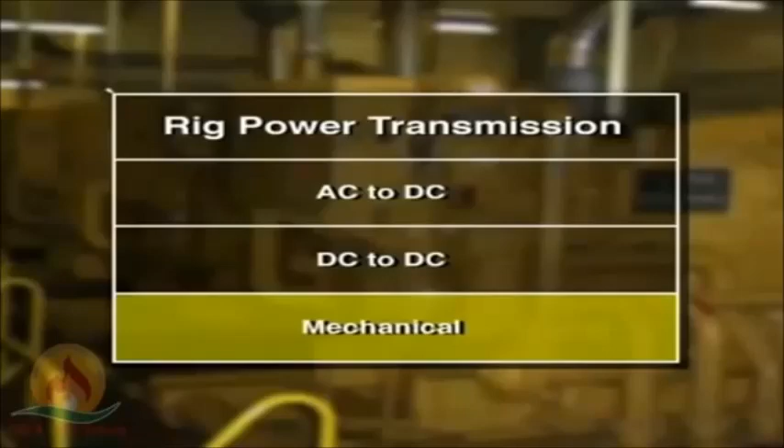At the heart of every rig power system, whether electrical or mechanical, is the prime mover. A prime mover is the rig's main source of power. Most rigs have more than one prime mover. Prime movers are almost always large internal combustion engines.

Some equipment on the rig requires hydraulic power and pneumatic power. The rig's hydraulic and pneumatic systems also obtain their power from one of the three basic distribution systems.

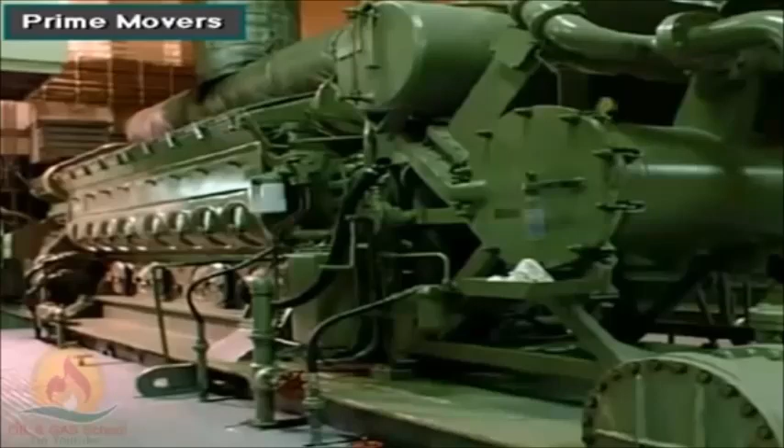Large diesel engines are the main power source, the prime movers for most rigs. These engines often produce from 500 to over 8,000 horsepower, or 350 to 5,600 kilowatts.

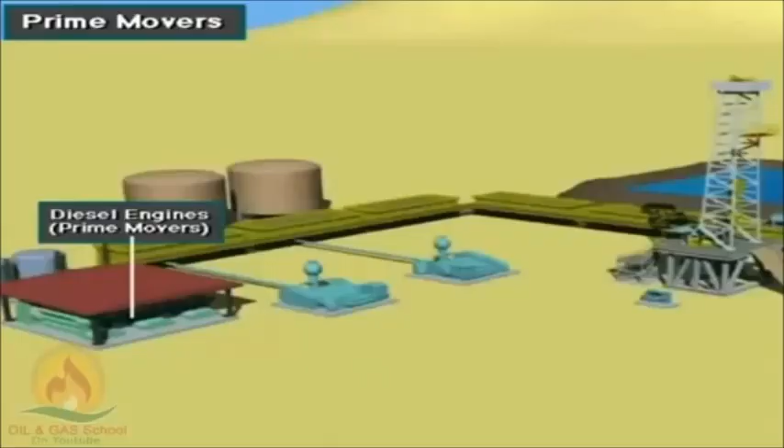Rig builders usually house several engines together to drive the rig equipment. They also keep extra engine sets available for backup operations.

Most rig engines are diesel because, unlike gasoline engines, they can produce a lot of power when running slow. Also, diesel fuel is not as volatile as gasoline, so it's safer to use, transport, and store.

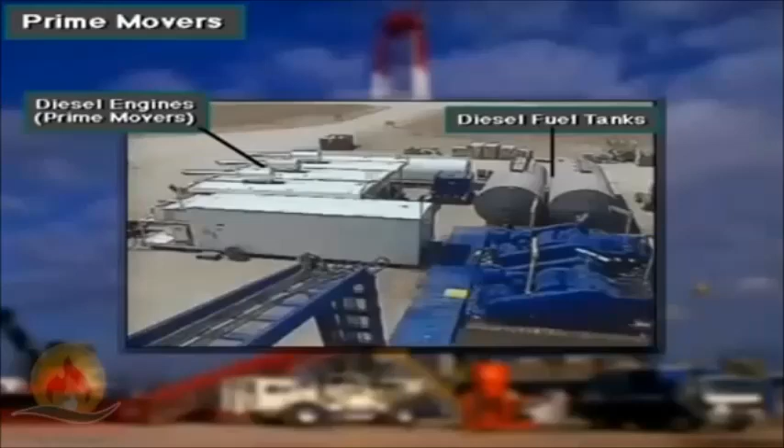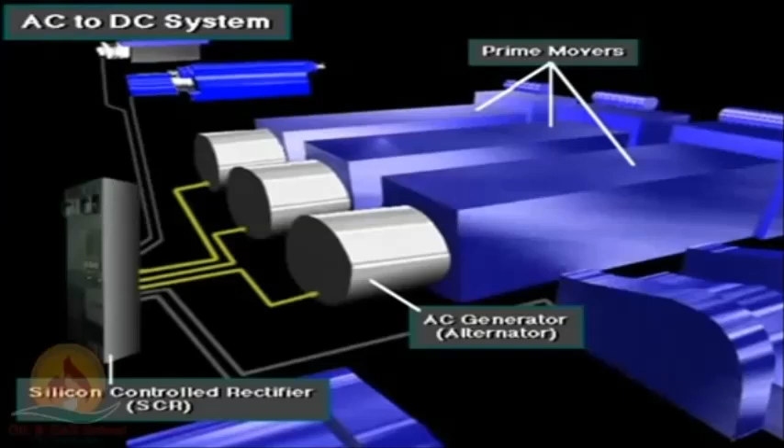The SCR converts AC to DC current, which drives the heavy rig equipment, such as the mud pumps, the drawworks, and the rotary system.

Auxiliary loads, such as small pumps and rig lighting, need lower voltage AC power, so a transformer steps down or reduces the voltage to the rig's auxiliary electric equipment.

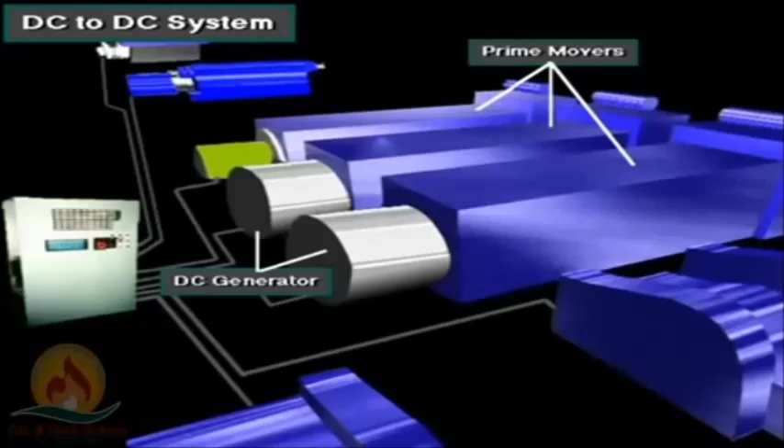Here's a DC to DC power system. The prime movers, usually diesel engines, power DC generators. From the generator, DC current goes through a control panel directly to DC motors.

The DC motors power the mud pumps, the drawworks, and the rotary system.

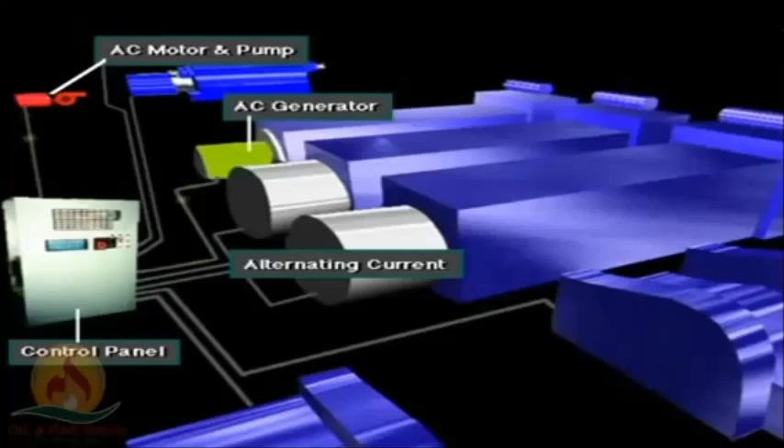A smaller AC generator is also part of the system. It supplies AC current for equipment that works best with this current type. For example, a chemical mixing pump requires AC power.

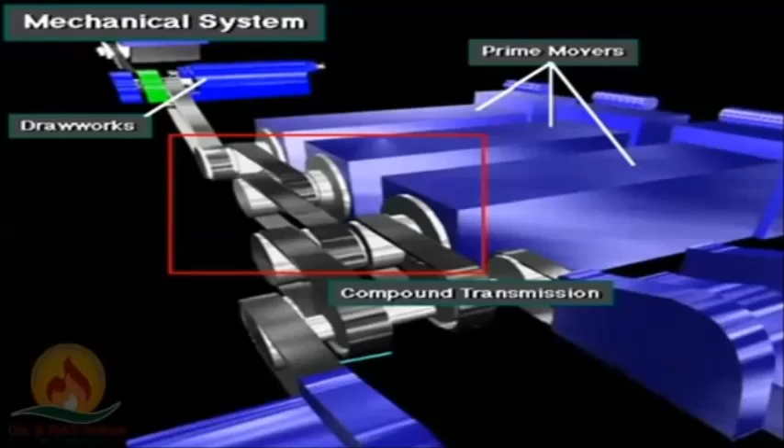The prime mover drives a mechanical compound transmission, which in turn powers the drawworks, the rotary table, and the mud pumps.

Auxiliary loads, such as small motors, are supplied with AC from an alternator connected to the prime mover.

Alternating current put out by the AC generators goes through heavy-duty electric cables to a special device called a silicon-controlled rectifier, or SCR. The SCR converts AC to DC.

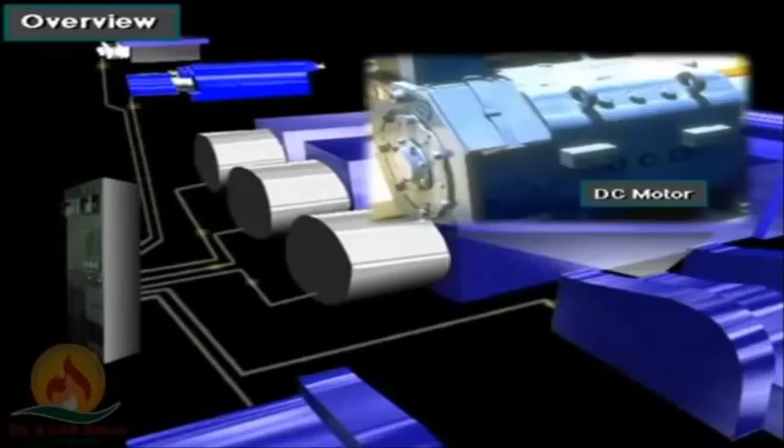Other heavy-duty electric cables carry DC electricity to the DC motors. The DC motors convert electrical energy back into mechanical energy to drive the powerful hoisting, rotating, and circulating equipment.

Rig owners like to use AC generators because they can be built to be very powerful for their size, which is an advantage over DC generators. Also, rig equipment can distribute AC easier than DC.

But direct current has certain advantages when driving large equipment. Mainly, DC motors produce a lot of torque at low speed that the drillers can easily control.

Using remote switches on his console to control the SCR control panel, the driller can select and deliver the power from the various generators wherever it is required.

But some AC generators power big motors. In fact, most of today's diesel electric rigs use AC generators in a system called an SCR power system.

Here, a large AC generator, an alternator, is connected to the diesel engine prime mover. As the engine mechanically drives the AC generator, the generator produces alternating current, or AC electricity. AC is like the electricity used in most cities and homes.

Equipment in this electrical cabinet converts, or rectifies is the electrical term, most of the AC current produced by the AC generators into direct current.

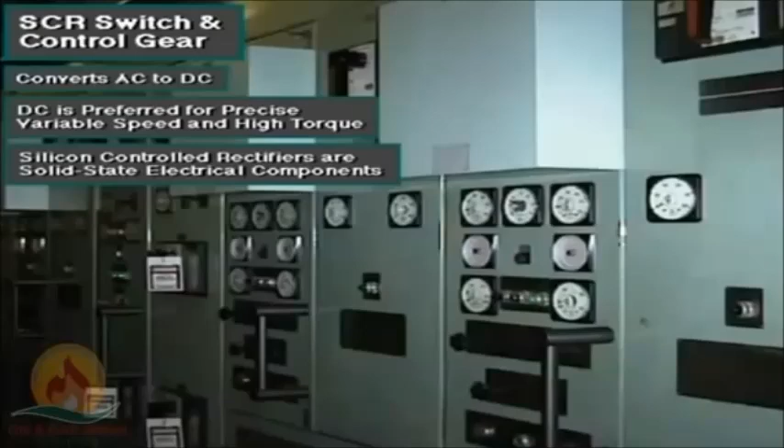The control equipment includes solid-state electrical components called silicon-controlled rectifiers, or SCRs. Heavy-duty electrical cables come out of the cabinet and carry DC electricity to the powerful motors driving the circulating, hoisting, and rotating equipment.

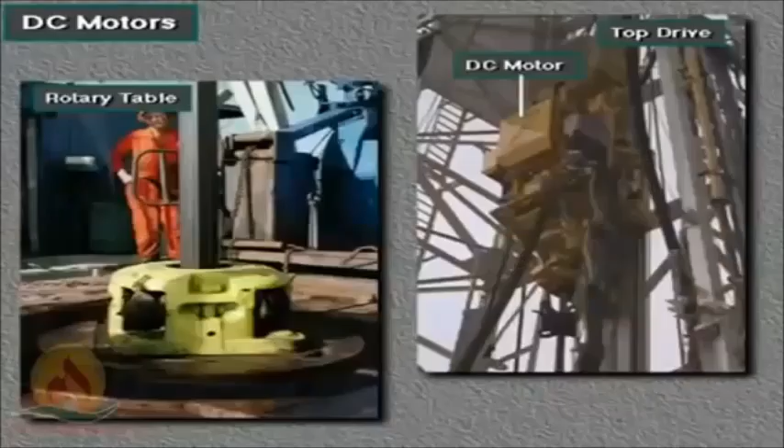Usually, large DC motors supply power to the mud pumps, the drawworks, and the rotary table or top drive. Sometimes the drawworks mechanically drives the rotary table, but on some rigs the rotary table has its own motor.

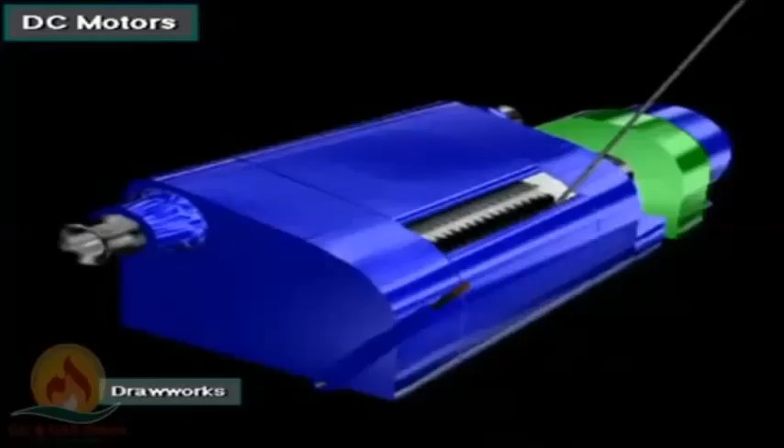The driller can control the speed of a DC motor very accurately, which is why rig owners use DC instead of AC motors. With accurate speed control, the driller can accurately set the speed the drawworks lifts, the mud pump operates, and the rotary table turns on rigs without a top drive.

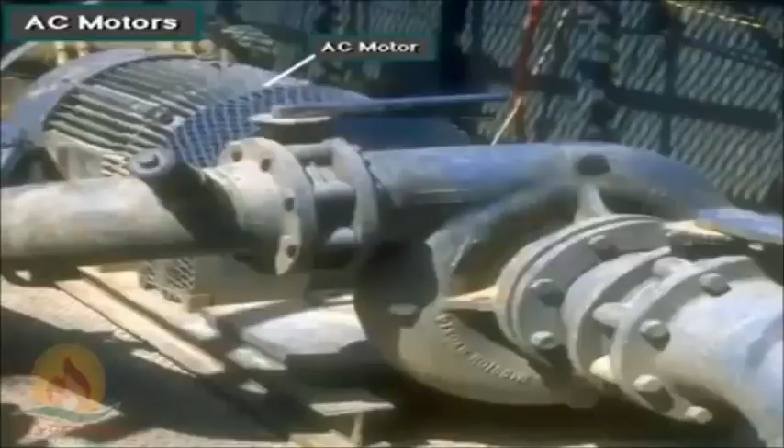Various small components on a rig need power too. For instance, these two centrifugal pumps move mud from a tank to supercharge the intake of the mud pumps. In this case, it's more efficient to use small motors to power the centrifugal pumps rather than using the prime movers, hydraulic fluid, or air.

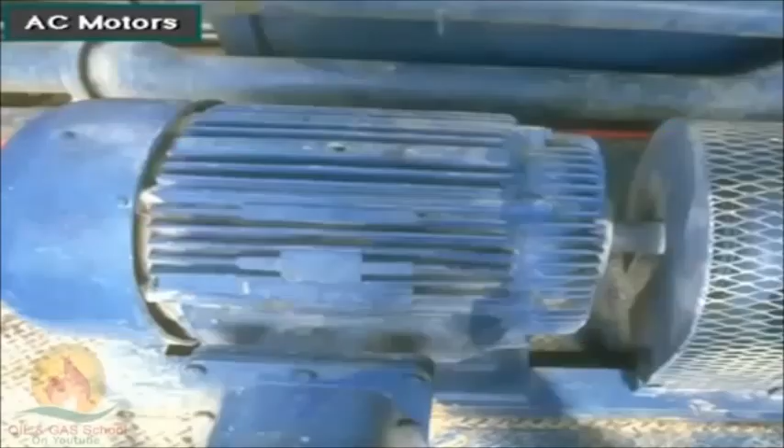Here's another AC motor. It powers the paddles on the mud agitator in a mixing tank. AC motors generally power equipment that does not require a lot of horsepower, so they vary in power from less than 1 horsepower, or 0.75 kilowatts, to more than 150 horsepower, 100 kilowatts.

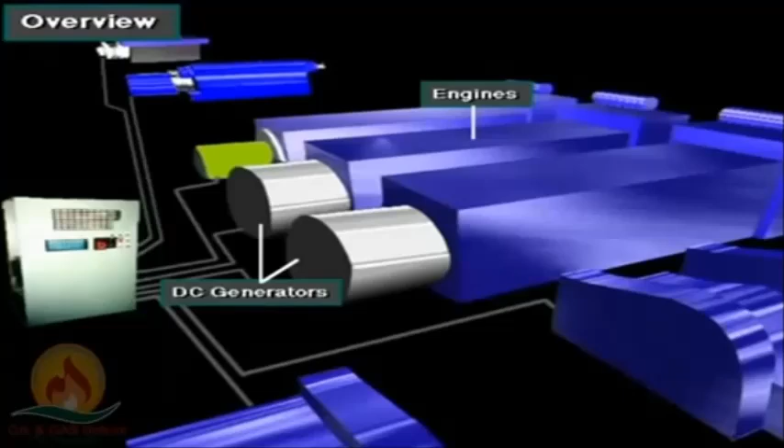For electric power distribution, some rigs use DC to DC power. DC to DC was the first electric power system. In a DC to DC system, each engine drives a DC generator, which converts the rotating mechanical energy of the diesel engine into DC electricity.

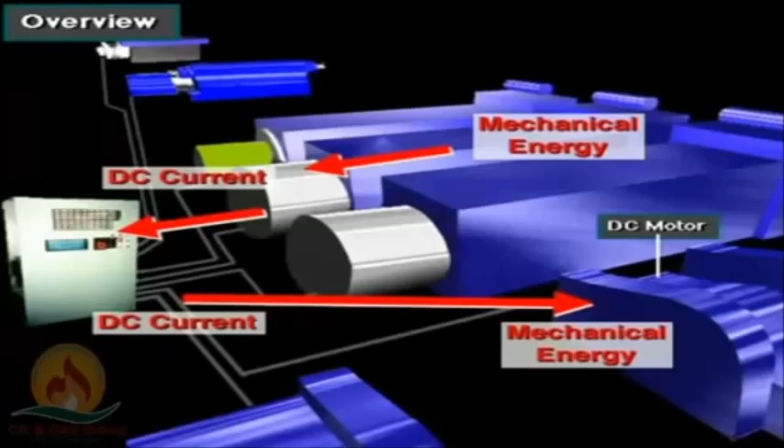Heavy-duty electrical cables carry DC electricity via the control panel to large 1,000 horsepower or 700 kilowatt DC motors. The motors convert the electricity back into mechanical energy. This mechanical energy powers the hoisting, rotating, and circulating equipment.

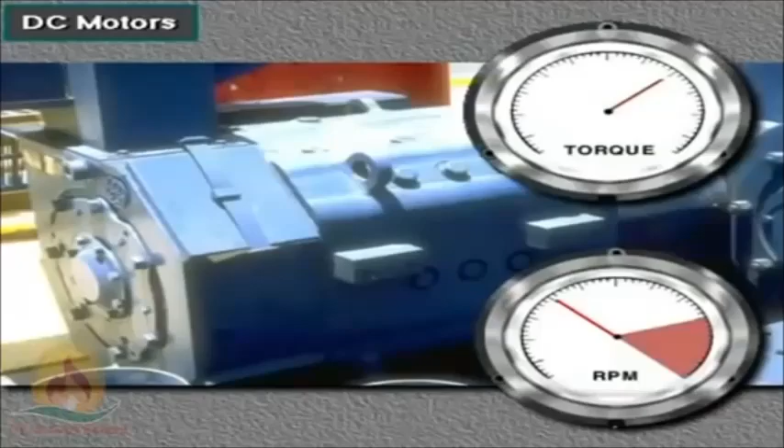For large equipment, most rig owners prefer DC motors over AC motors. DC motors put out high torque, twisting force, at low speed. Further, the driller can easily control the torque from his console on the rig floor. Keep in mind, though, that recent technological advances are allowing computerized controls and variable speed AC motor drives to be used where only DC motors were used in the past.

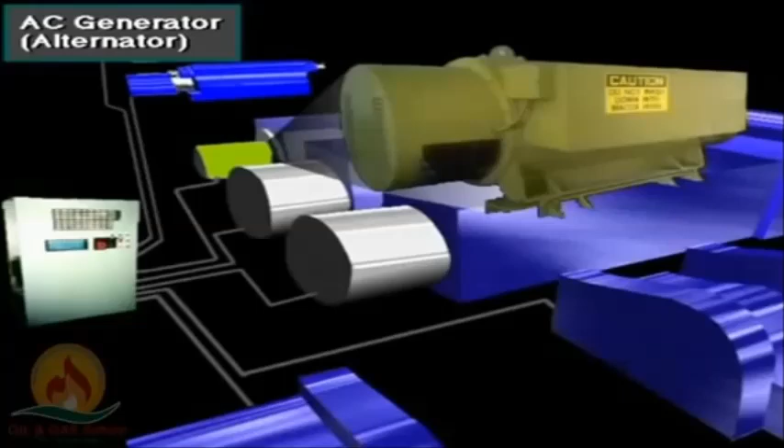This is a generator, or alternator, on a DC to DC rig. It generates the AC electricity that DC to DC rigs need. The alternator powers smaller equipment on the DC to DC rig, like the small AC motors on centrifugal pumps.

Air conditioners. Lights. Fans. Water maker units and other small equipment.

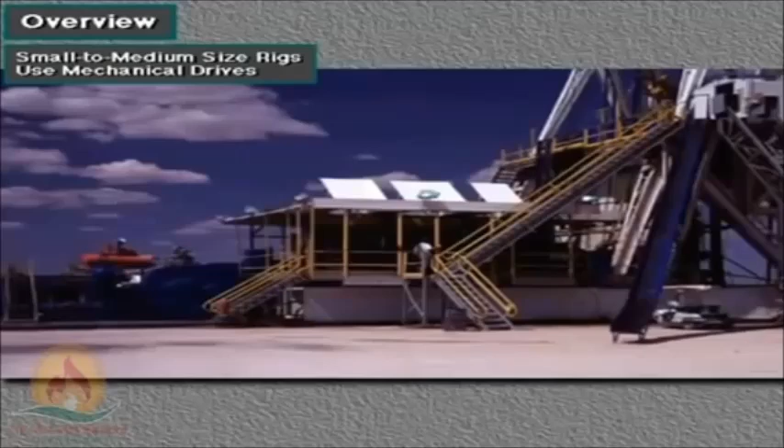Mechanical drive rigs normally compound or connect 2 or more engines to drive the main pumping, rotating, and hoisting equipment. Generally, small to medium-sized land rigs use mechanical drives.

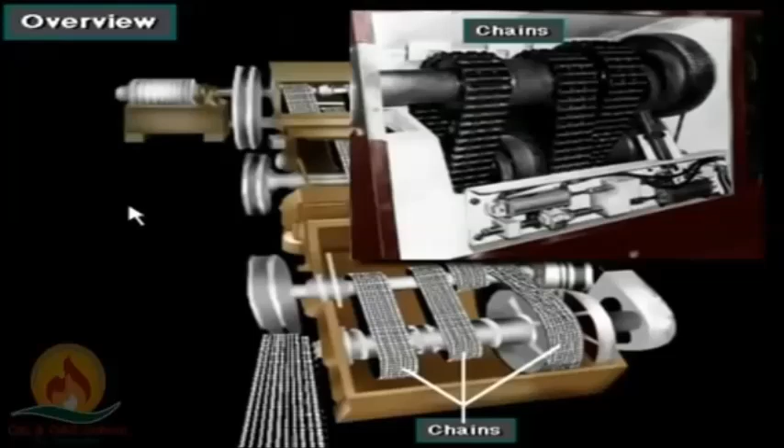They use clutches, converters, chains, shafts, belts, or compounding transmissions to connect the prime movers to the driven equipment.

Here's a common way to get power to the components on a mechanical drive rig. This shows 3 engines that the rig owner compounded. That is, the power from each engine goes through a series of sprockets and chains in a housing, called a compound.

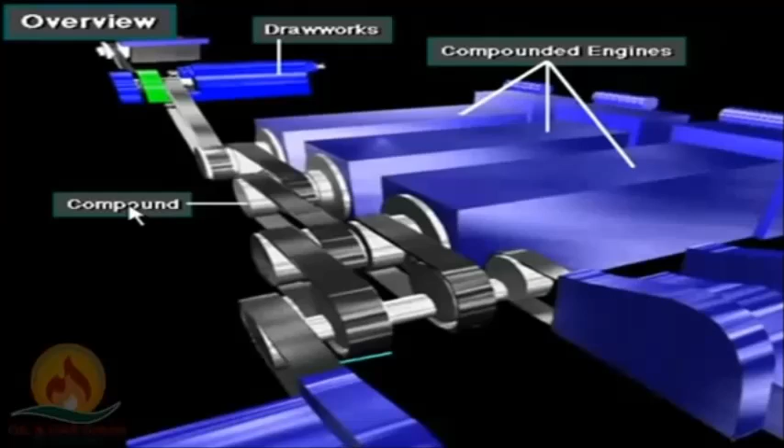The compound transfers engine power to the drawworks, the rotary table, and the mud pumps.

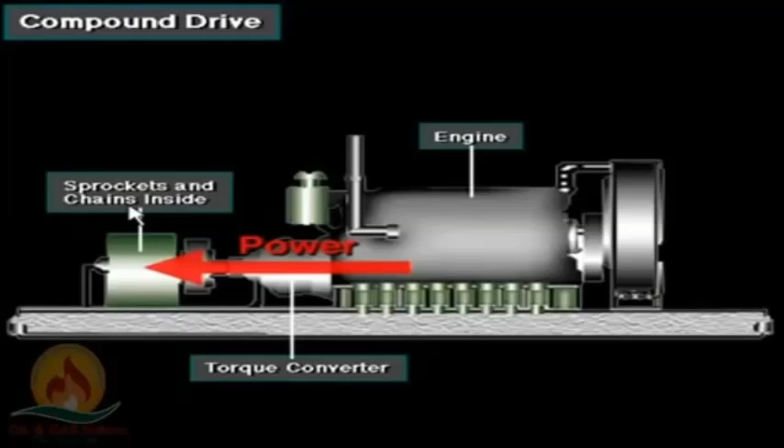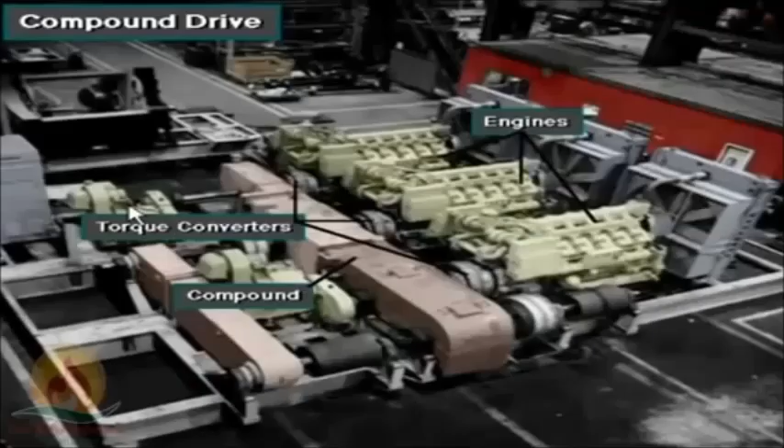In a compound drive, engine power usually goes through torque converters to the sprockets and chains. Steel guards cover the sprockets and chains, removed here so you can see them. Torque converters smoothly transfer engine power to the compound.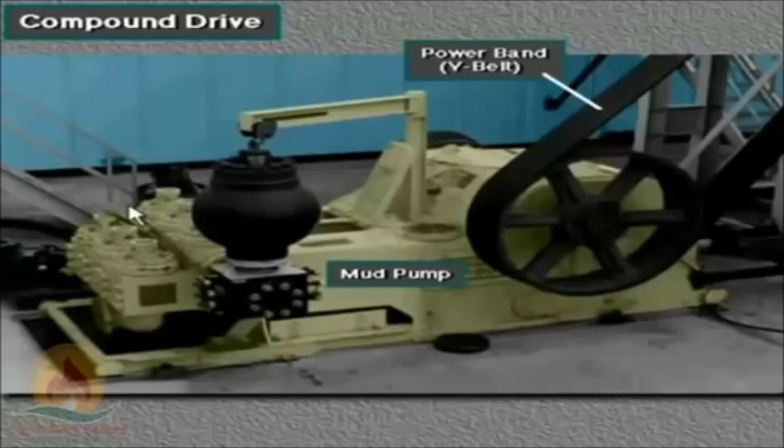Here, you can see the steel guards covering the machinery in the compound. Not only do the guards protect personnel, they also keep a lubricating oil spray confined to the chains and sprockets. Also, note that large V-belts, called power bands, drive the mud pumps. Steel shrouds also guard them.

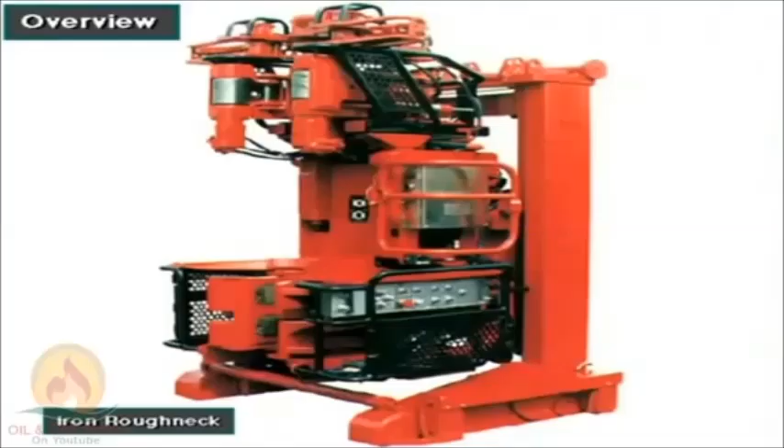Many tools use hydraulics to transmit power. Examples include the Kelly spinner, the iron roughneck, and casing tongs.

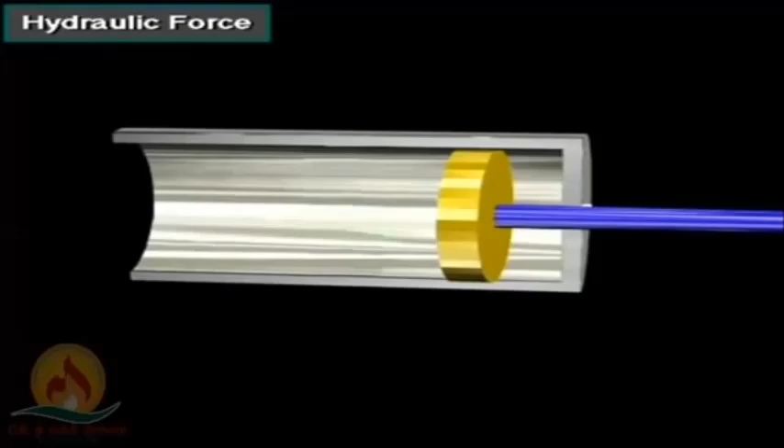Hydraulics is a means of transmitting power by pushing on a confined liquid. Here's a piston moving inside a cylinder. Hydraulic fluid fills the cylinder to the left of the piston. The piston's surface area is 10 square inches.

If a pump puts 1,000 pounds per square inch, or psi, of hydraulic fluid pressure on one side of the piston, this 1,000 psi acts on the 10 square inch piston to produce 10,000 pounds of force. That's a lot of force available for powering certain tools and equipment.

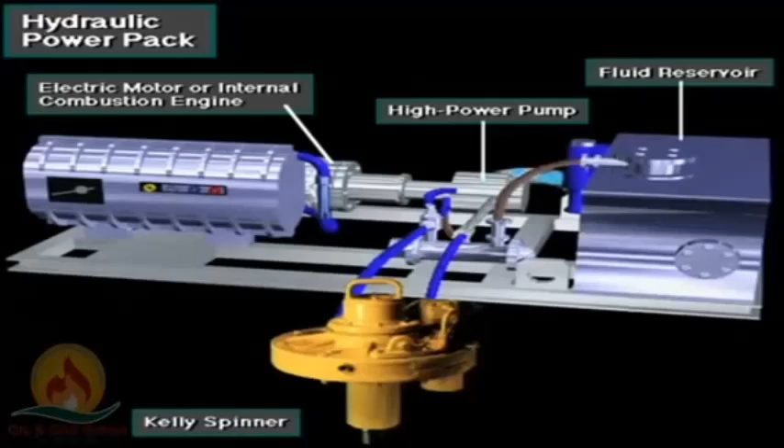Here's a typical hydraulic power pack used on many rigs. It has an electrical motor or an internal combustion engine to power the high-power pump. The pump takes hydraulic fluid from the reservoir and sends it out a high-strength steel-reinforced hose to the devices needing hydraulic power.

The fluid returns to the reservoir after it passes through the Kelly spinner or other tool. The hydraulic power pack is a closed system. The fluid is used over and over.

Certain controls, valves, and tools on the rig are air or pneumatically operated. For instance, the driller uses pneumatic controls on the driller's console to engage and disengage clutches on equipment like the drawworks.

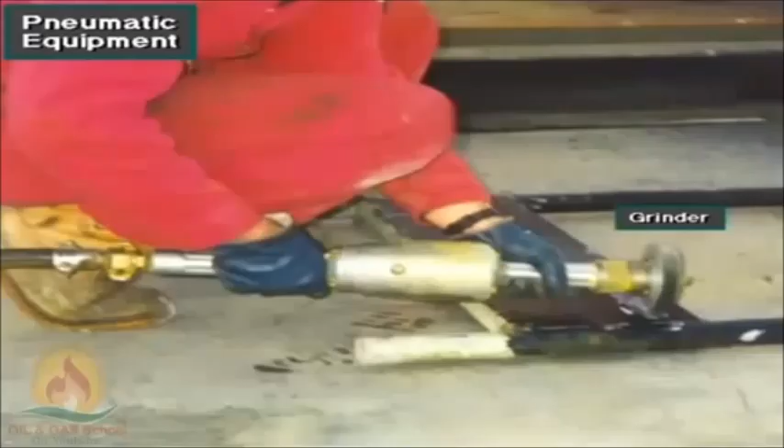The rig crew may use air-powered hand tools, like a grinder. They also use an air hoist, an air-powered winch, to hoist and move relatively light equipment onto and around the rig floor.

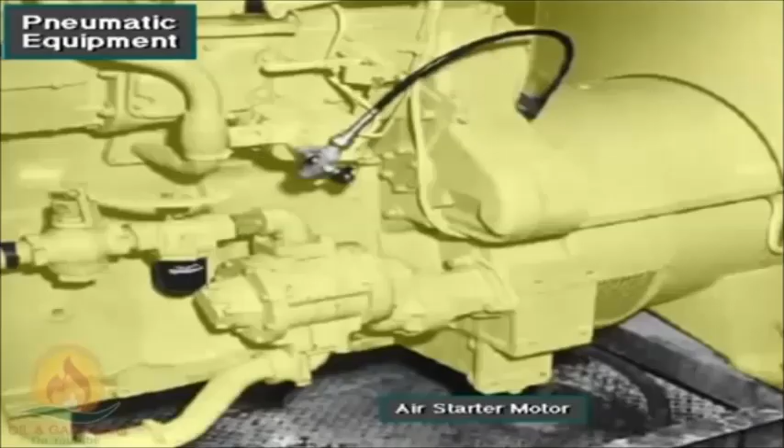Many diesel engines on rigs have an air starter, which is an air-operated motor that turns the engine crankshaft over to start it. Finally, a floating rig's motion compensator operates on large amounts of compressed air to compensate for vessel heave while keeping the drill string in position.

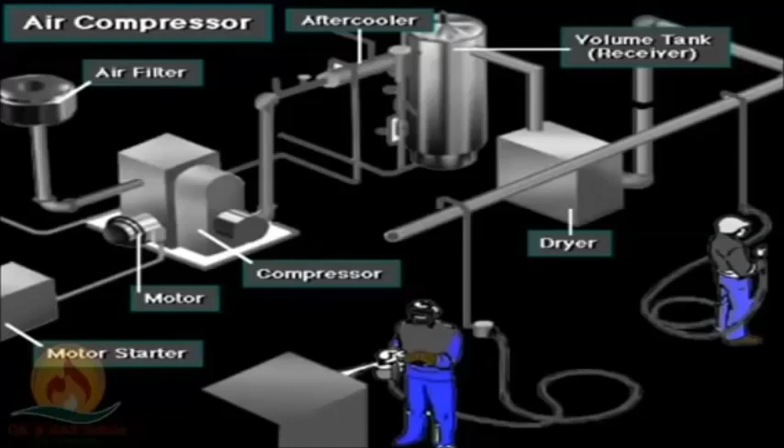An air compression system provides air pressure to operate the pneumatic controls, valves, and tools on the rig. Rigs use rotary screw compressors or reciprocating compressors to compress air. A typical reciprocating air compressor has 2, 3, or 4 pistons moving inside cylinders.

The compressor takes in air from the atmosphere and raises its pressure, that is, compresses it. The volume tank stores a given amount or volume of compressed air that is ready for use when needed.

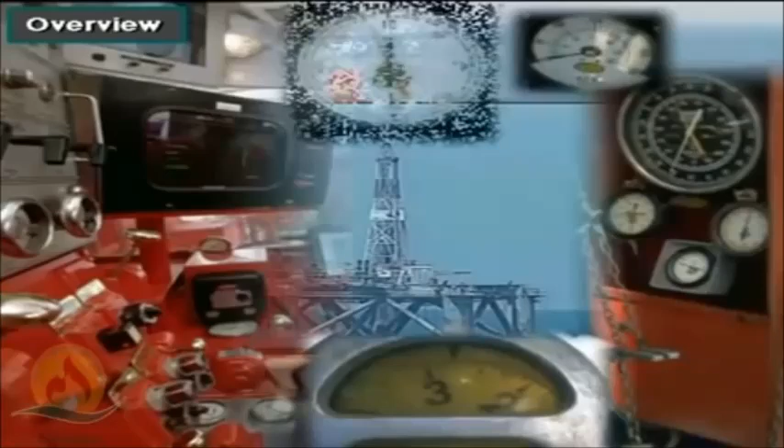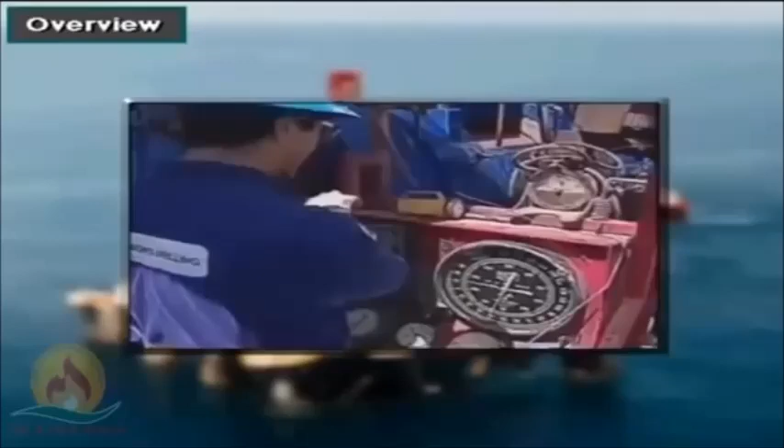A drilling rig has many instruments and gauges. They help the driller and other crew members keep track of the drilling operation. Rig instruments vary from the most basic to sophisticated computers with video displays. Here, we'll cover the basics.

The driller's console is the driller's workstation on the rig floor. It has several instruments and gauges. All of them help drillers track the drilling process and keep them informed of the situation.

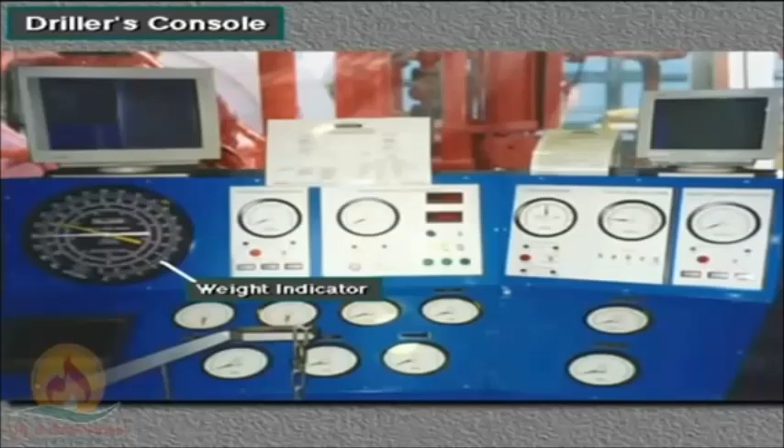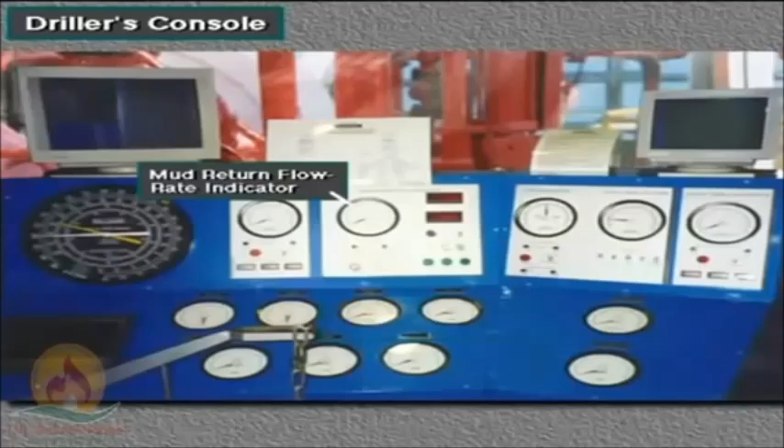Indicators and gauges on the driller's console include the weight indicator, the pump rate indicator, mud pump pressure gauge, rotary tachometer, rotary torque gauge, tong torque gauge, mud return flow rate indicator, mud tank level indicator, and trip tank volume indicator.

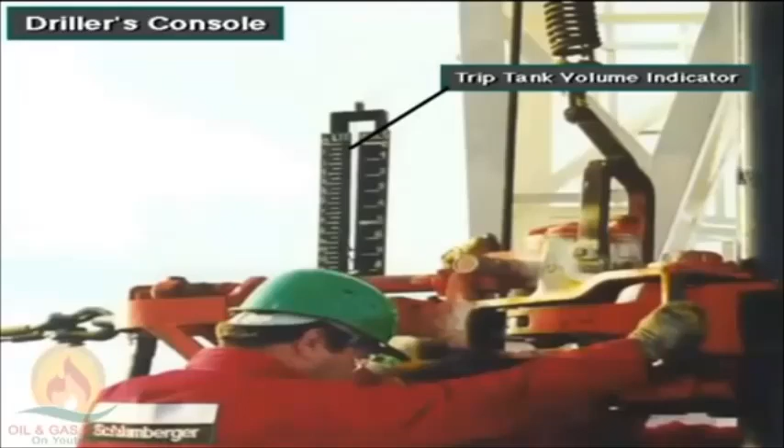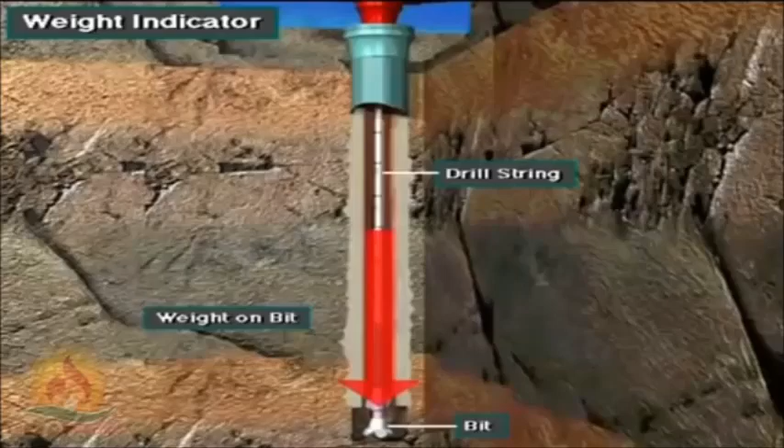The weight indicator is the largest gauge on the driller's panel. It indicates the hook load and weight on the bit. The hook load is the total amount of weight hanging from the hook. Weight on the bit, or WOB, is the amount of weight put on the bit by the drill string. It is less than the hook load.

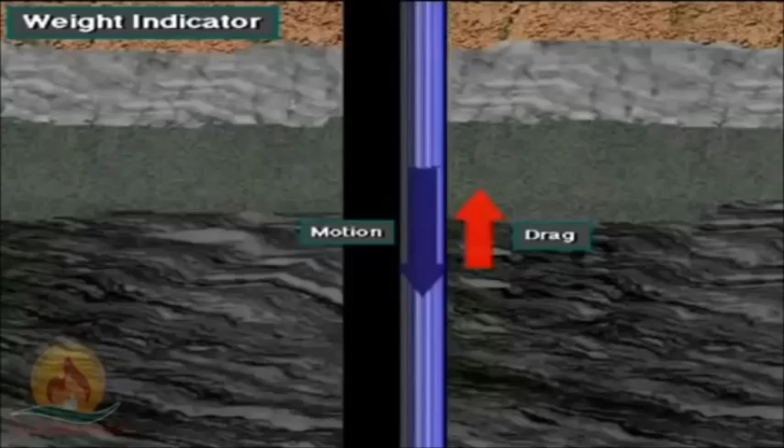The weight indicator is extremely sensitive to hook load changes. Drillers can use hook load changes to monitor the amount of drag or friction the well bore puts on the drill string when they move the pipe up or down. Or, because it is so precise, the driller can use it to monitor the operation of downhole tools requiring small variations in weight.

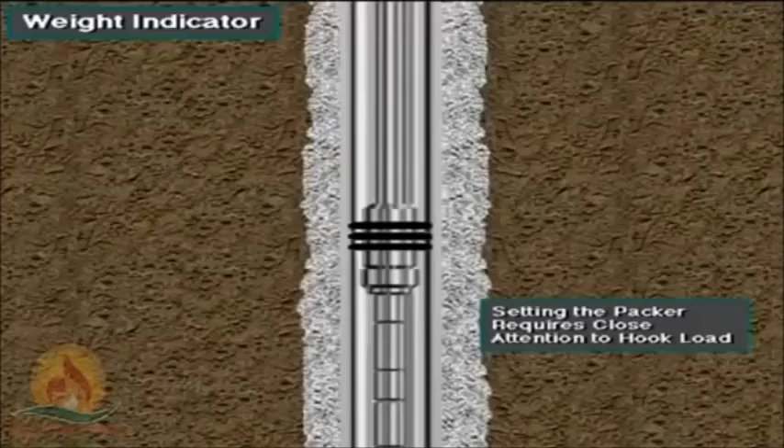The pump rate gauge shows the number of times one mud pump piston moves per minute. This console has two pump rate gauges because the rig has two mud pumps. The driller can determine the total volume of mud being pumped by multiplying the pump rate by the number of pistons in the pump times the amount of mud each piston pumps.

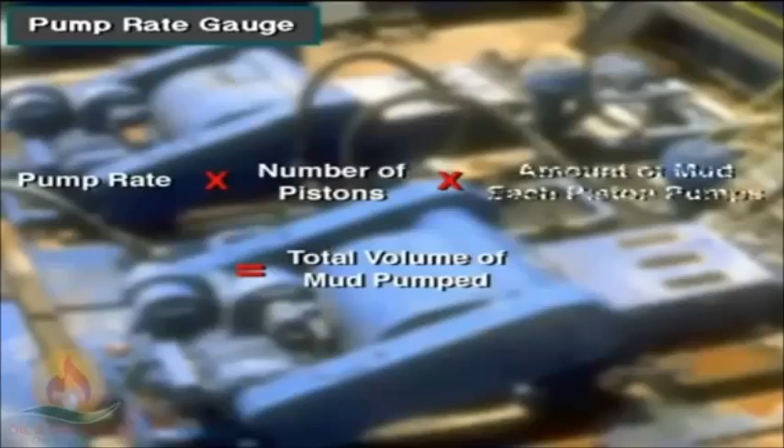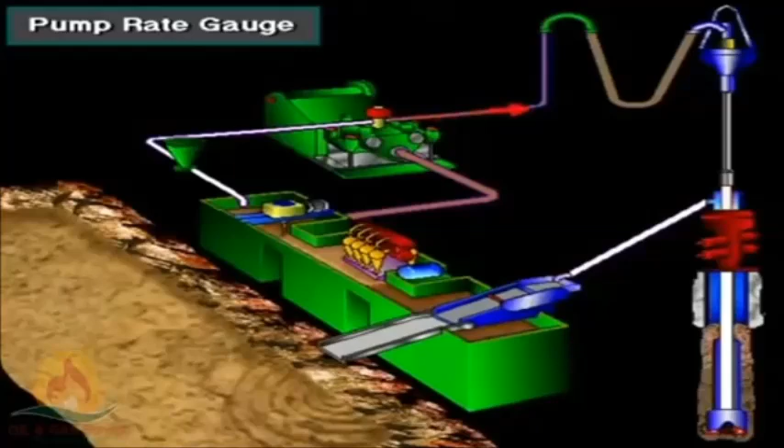The mud pump pressure gauge shows drillers the amount of pressure the pump is putting out. They monitor pump pressure from the standpipe to ensure that it is the correct amount needed to keep the hole clean and return cuttings back to the surface.

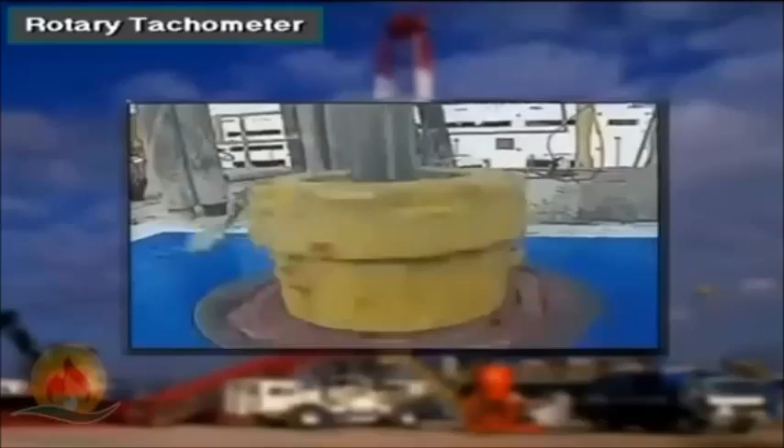The rotary tachometer shows the revolutions per minute, or RPM, of the rotary table or top drive unit. Drillers monitor rotary RPM because they need to know the rate the bit is turning. Different bits rotate at different RPMs. RPM ranges for a bit are specified by the manufacturer.

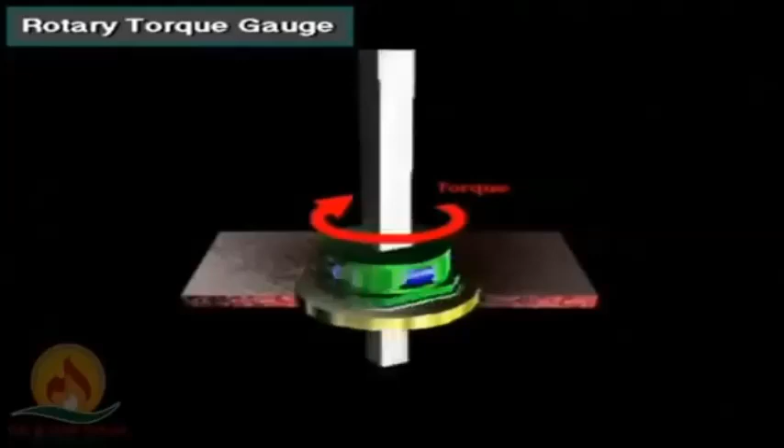Drillers use the rotary torque gauge to see how much twisting force, or torque, the rotary is applying to the drill string. Knowing rotary torque helps keep drillers from parting the drill string because of too much rotary torque. Parting the drill string in this manner is called twisting off.

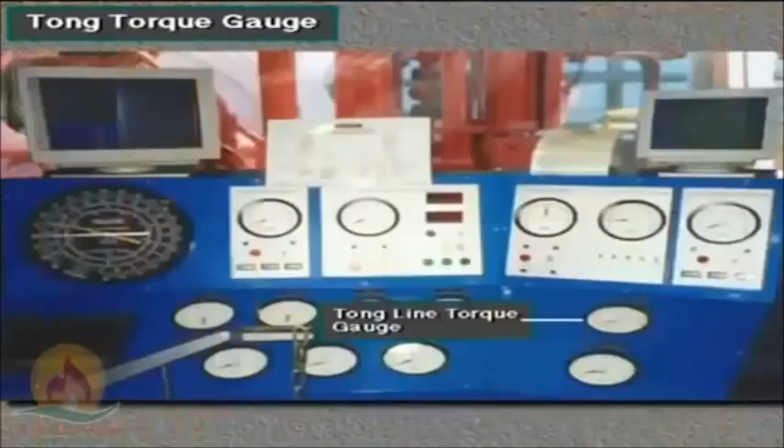A tong torque gauge helps the driller and the rotary helpers make up the drill pipe and drill collars with the right amount of torque. Too little torque, or tightness in the connection, may leak or unscrew while drilling. Too much torque can damage or gall threads, which cause them to leak and eventually to come apart.

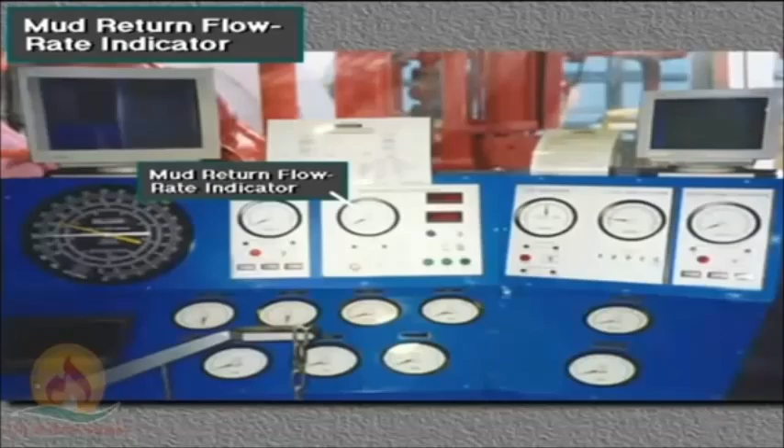Drillers use the mud return flow rate gauge as a relative indicator of how much drilling fluid is returning at the flow line. The sensor is mounted in the mud return line, the flow line.

A paddle inside the return line moves as mud flows past it. As the paddle moves, it sends a signal to a readout panel mounted in the driller's control console. The driller sets the readout so that as long as return flow is normal with constant pump speed and output, no alarm sounds or lights up.

However, when the return flow rate changes, increases or decreases, the paddle's motion also changes. This change in paddle motion sends a signal to the driller's readout and sounds or illuminates an alarm.

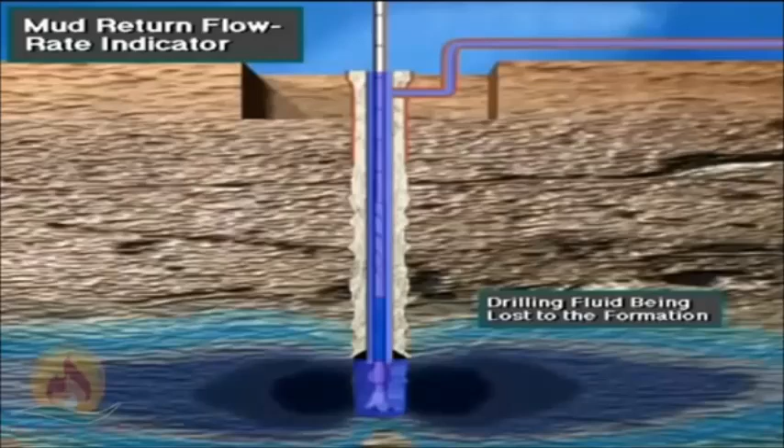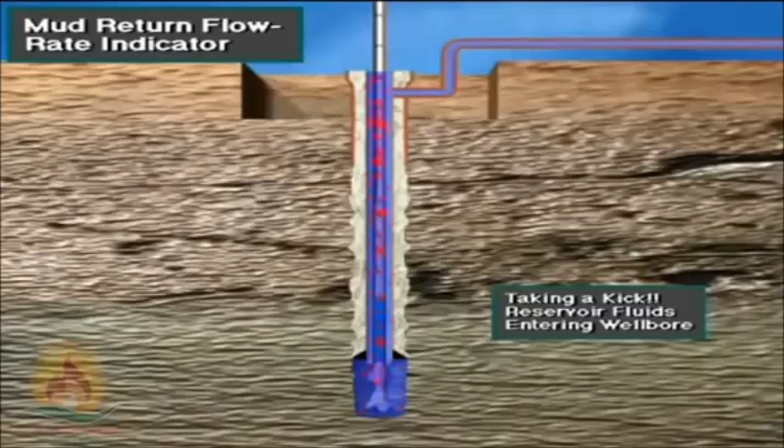A change in the return flow rate of the mud may indicate one of two things. If the flow rate decreases, mud may be being lost to a downhole formation. If the flow rate increases, formation fluids may have entered the hole and are forcing drilling mud out. So a mud return flow rate indicator can help drillers detect kicks and loss of circulation.

This mud tank has a special float in it. It goes up or down as the mud level in the tank rises or falls. Usually several mud tanks have floats in them. The floats send a signal to a digital totalizing panel mounted on the driller's console.

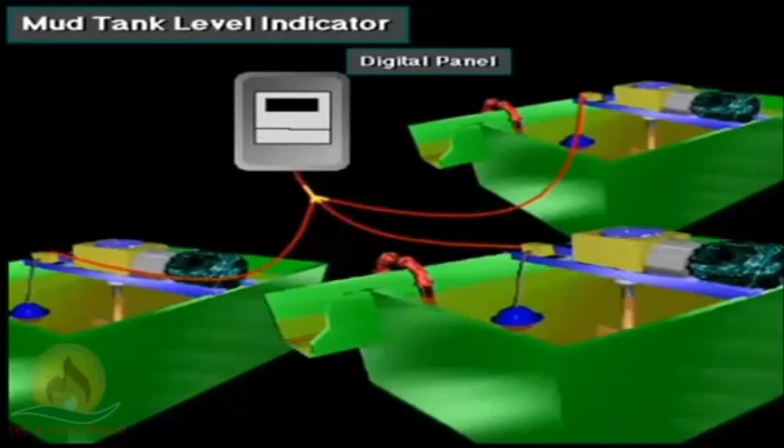This panel takes the tank level signals from all the floats in the tanks, totals them, and sends the information to the chart recorder next to the panel on the rig floor close to the driller's console.

If the level of mud in the tanks falls and no one has removed mud from the tanks, then it is likely that mud is being lost to a downhole formation. If the level of mud in the tanks rises and no one has added mud to the system, then it's likely that formation fluids are flowing into the well. Thus, a mud tank level indicator is another tool to help the driller detect kicks and loss of circulation.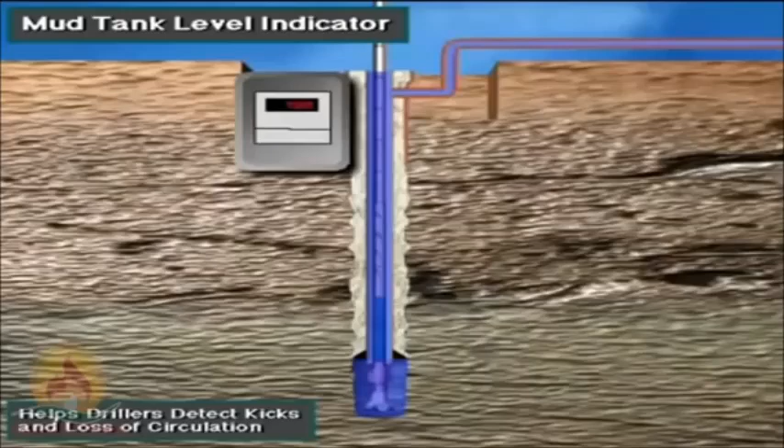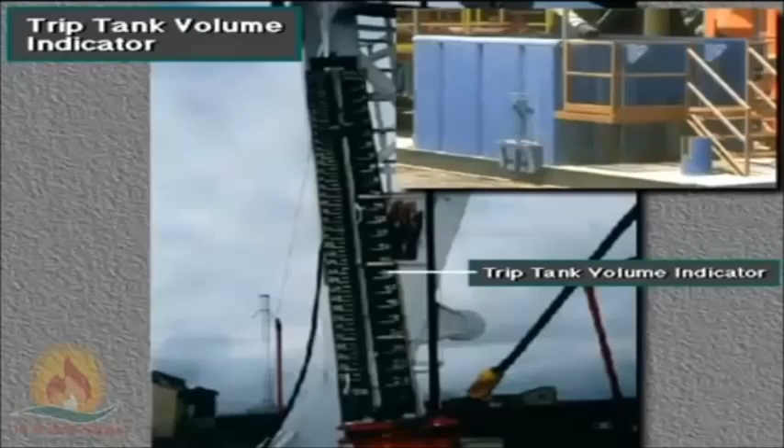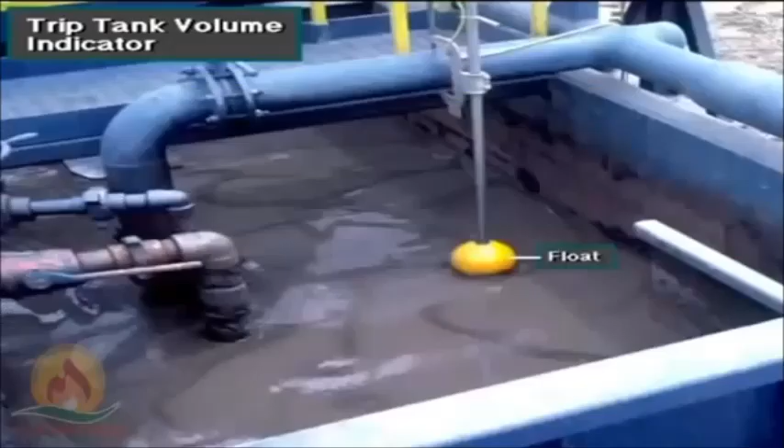A trip tank volume indicator helps the driller monitor the amount of mud being displaced by the tubulars or wire rope being run in and pulled out of the hole. Crew members calculate tubular displacement before each trip using tables from a handbook. Then, during a trip, they compare the calculated volumes to the actual displacement. Close monitoring of the trip tank during trips is crucial to proper well control.

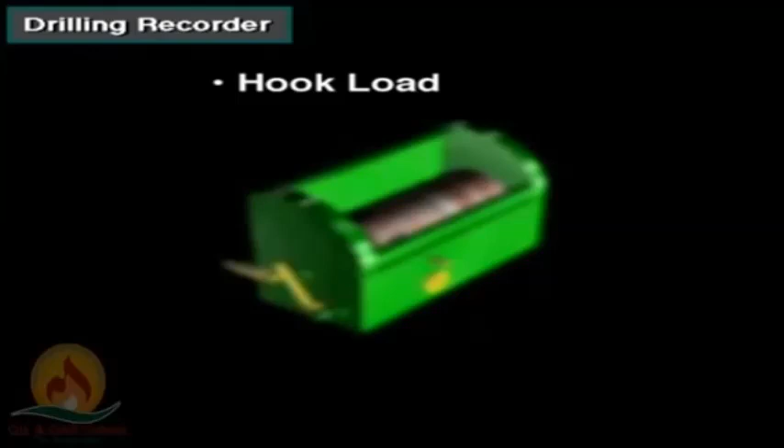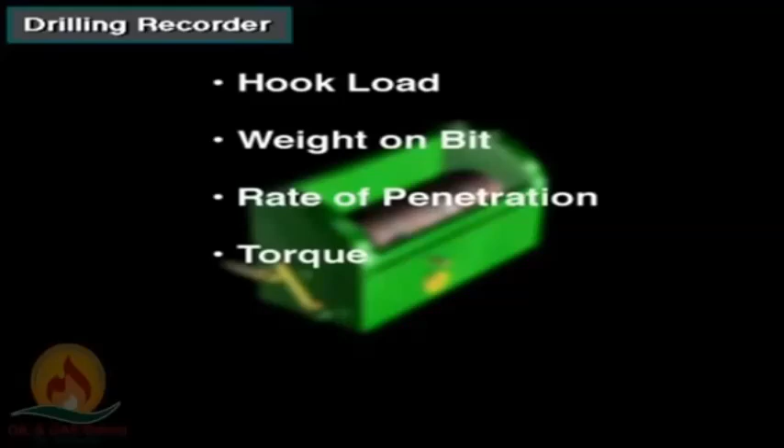A drilling recorder makes a record of drilling variables, such as the hook load, weight on bit, rate of penetration, torque, pump strokes, and pump pressure during drilling. It's usually located in the doghouse on the rig floor.

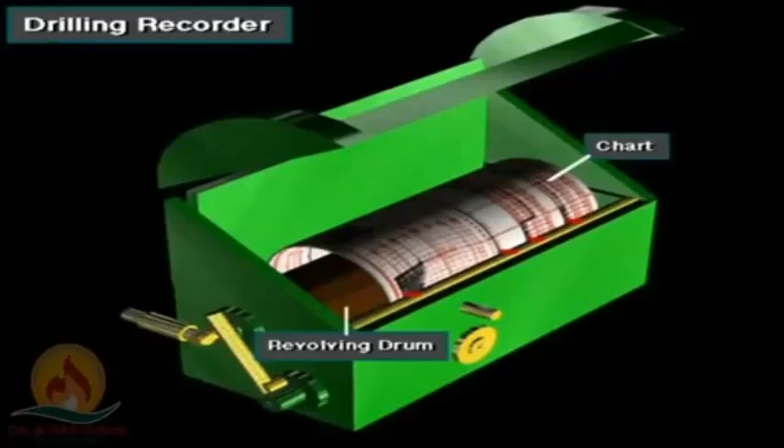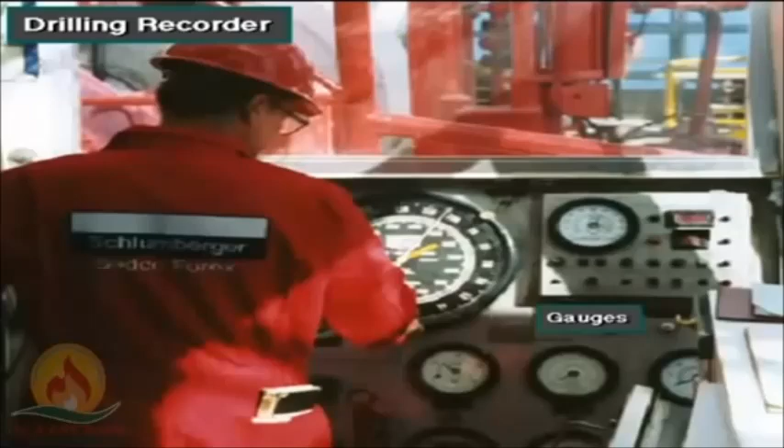The driller puts a chart onto the revolving drum. Several pens with ink in them trace records onto the chart. Drilling recorders may have from one to several pens, depending on how they're hooked up. The recorder gets signals from sensors mounted near the gauges that measure the drilling variables. For instance, a load cell on the deadline anchor senses hook load and weight on bit.

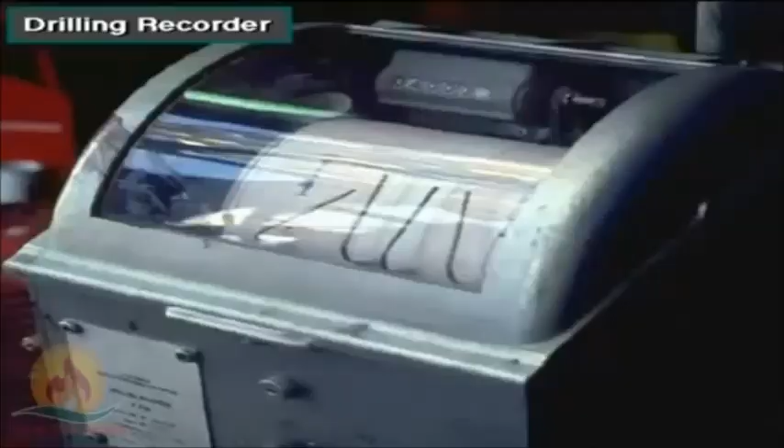Here's a photo of a drilling recorder. Note that it has a hinged plexiglass cover that drillers can raise to change the chart when necessary.

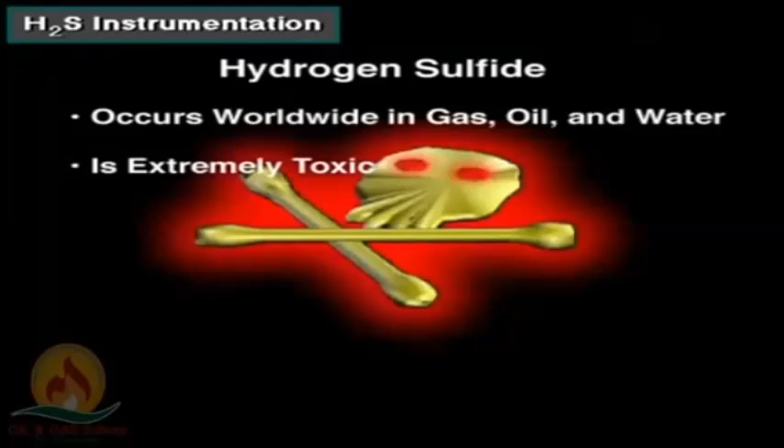Hydrogen sulfide, H2S, or sour gas, is the most poisonous gas encountered in drilling operations. It occurs worldwide in various concentrations associated with gas, oil, and water produced from wells. It is extremely toxic, explosive, and heavier than air.

It is also colorless, so you cannot see it. In low concentrations, it smells like rotten eggs. But you cannot depend on your sense of smell to escape harm. H2S quickly deadens your ability to smell.

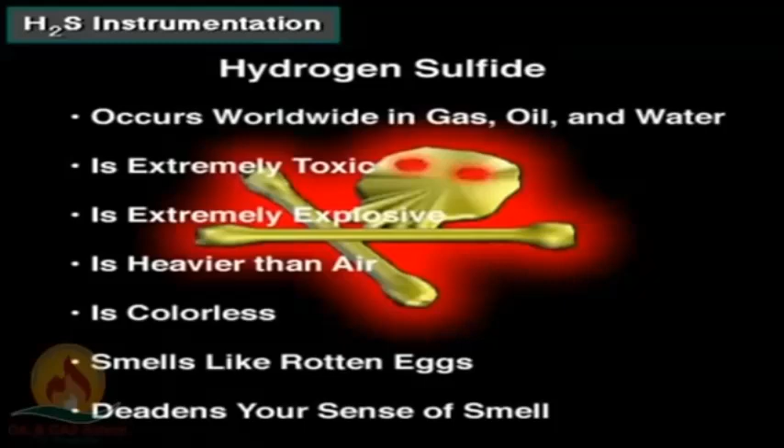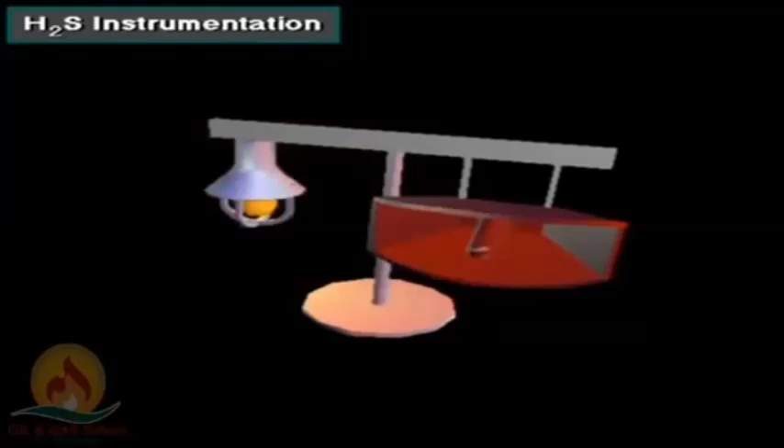Where H2S may be present, rigs are equipped with sensors, automatic monitors, and alarms. This is an audible and visual H2S alarm. The horn sounds a siren, while the light flashes brightly if they're activated by H2S sensors placed on the rig.

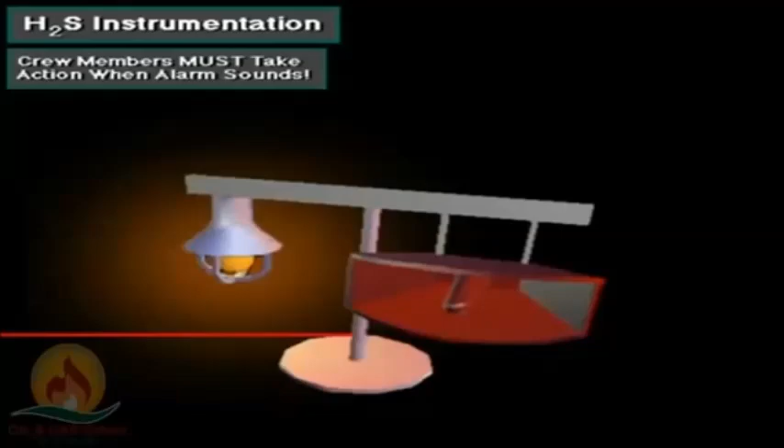When a sensor picks up H2S gas above a predetermined level, the monitor triggers both the visual and audible alarms. Upon hearing or seeing the alarm, crew members must take action to avoid injury or death. You will receive detailed H2S training if your rig is working in an area where H2S may be encountered.

At the heart of every rig power system, whether electrical or mechanical, is the prime mover. A prime mover is the rig's main source of power. Most rigs have more than one prime mover. Prime movers are almost always large internal combustion engines. Some equipment...